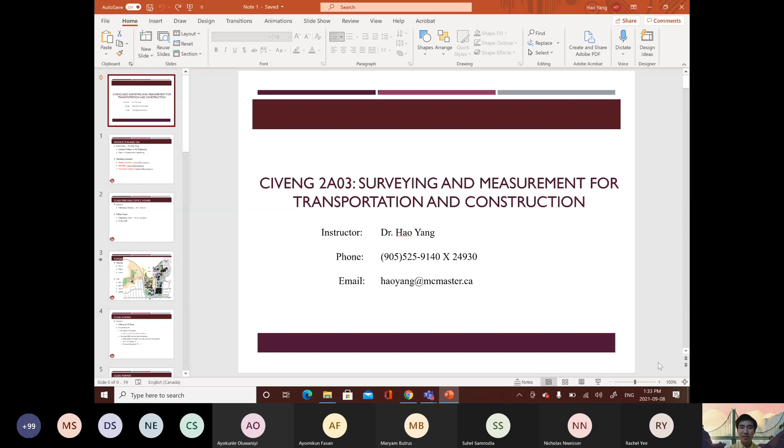First of all, my name is Hao Yang. I'm now a faculty in the Department of Civil Engineering. You can find my office phone number and email address. This year it might not be easy to find me through the phone, but I will always reply through email. Also, as we are using MS Teams, if you have any questions about the class, homework assignment, or exams, you can always send me a message through Teams.

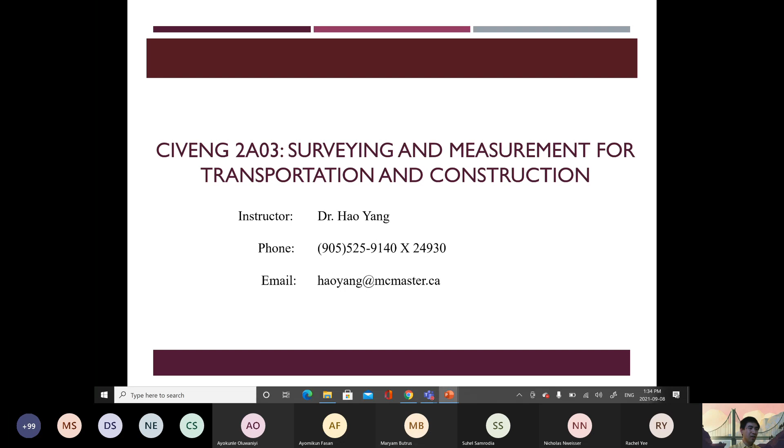For the instructors and TAs of this class, I'm Hao Yang, and my major is transport engineering, which is also the reason we have some slight modifications to the previous surveying class. In the updated course contents, we will focus more on surveying in the areas of transportation, like how to conduct surveying about curves, and how to conduct route surveying to design highways and local roads. Those contents will be included in almost the second half of this class.

So those are the persons that are going to support this class.

Regarding the class time and office hour, you may already know the class will be offered twice every week, on Wednesday and Thursday at 1:30 to 2:20 p.m. So we have 2 one-hour sessions every week. For the office hour, I designed a 1-hour office hour just before the lecture on Wednesday, and it will also be offered through MS Teams.

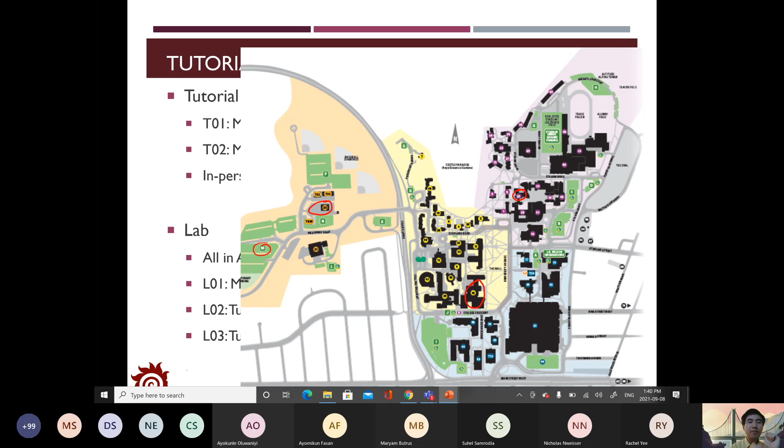We will have 3 lab sessions every week: Monday morning, Tuesday morning, and Tuesday afternoon. I know each of you have already selected one session, and some of you will attend the in-person lab experiment. This means we need to know the details about how many students will be in each session. With that, we can assign the teams for this class. Usually each team will have 5 students, so you 5 can work together to complete all the lab experiments. So that's all the schedules for the sessions in this class.

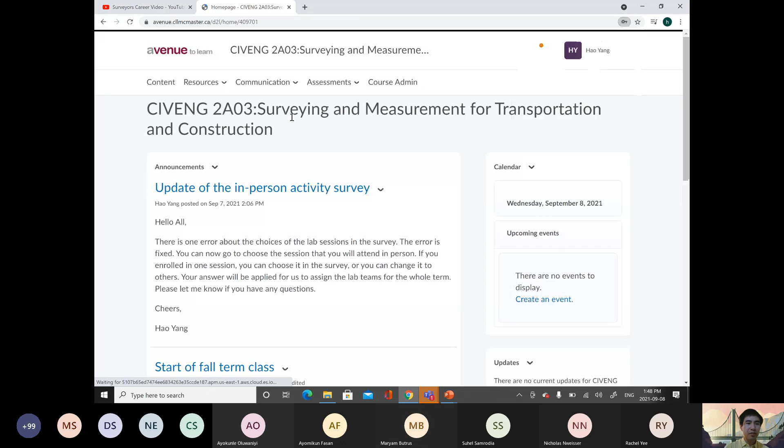So you need to go to the class and enter the survey, enter the resource. You can find it if you scroll down to the end, and there is a survey.

You can choose the first one, the in-person activity survey. There will be 3 questions you need to answer. The platform on your side will be different from mine. I'm the owner, so I'm not allowed to make any selections, but on your side you can directly see all 3 questions and make your selection about whether you're going to take the in-person activity or which lab sessions you're going to join.

The next question is whether labs and tutorials alternate each week, or there's both each week. That depends. I will show you more details about the schedule of the tutorial session and the lab session, so you will know what you need to do for each week, whether there's any tutorial or lab session. But the schedule for the lab session is not finalized yet because we don't know how many students will attend the in-person activity.

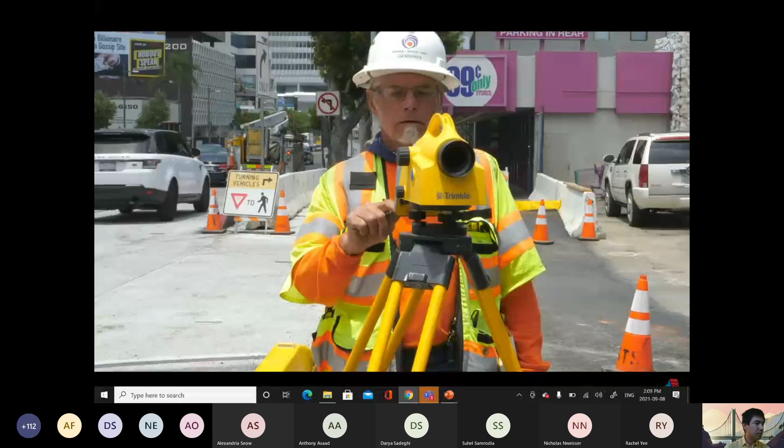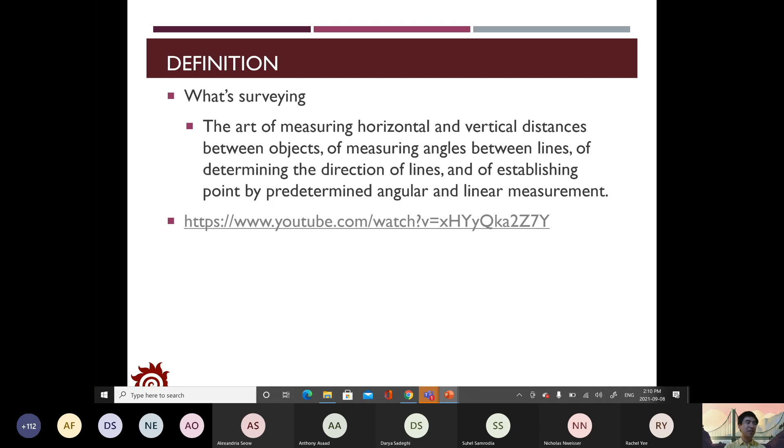Okay, I found that we cannot hear the voice. It doesn't matter, you can actually watch the video later after class. It's a very brief introduction about what kind of tasks the surveyor will need to do. After class, you can just click the video in these notes, which are uploaded to Avenue to Learn, and you can watch them to get more details.

So that's the very brief introduction about surveying. The next thing I'll show you is another definition of surveying. Surveying is also an art - we can only rely on surveyors who possess thorough understanding of surveying techniques, and we'll be able to use these techniques to determine the most efficient methods to obtain optimal results over a wide variety of surveying problems.

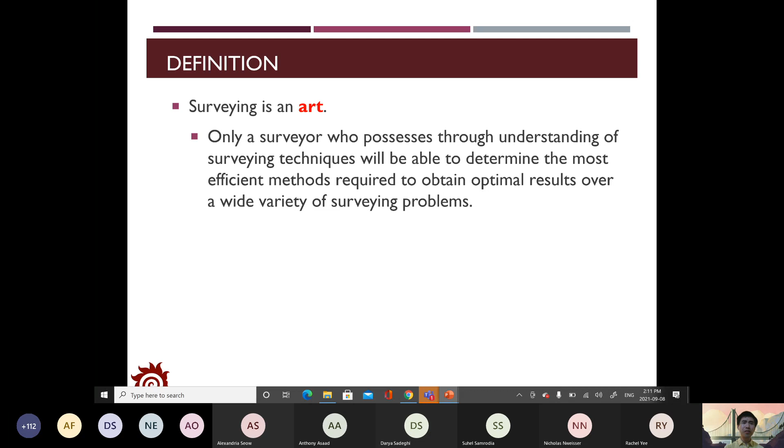For example, if we want to design a highway, we must use surveying to find a way to smooth those corners, and also try to minimize the usage of materials to construct the highway. So all these things require us to do a survey before we start a project.

On the other side, survey is also a science, and we use a lot of mathematical technologies to analyze the data we collect from the field. We also need to do some analysis about the accuracy and reliability of those measurements, and we have to understand the properties of the tools we apply to conduct the surveying.

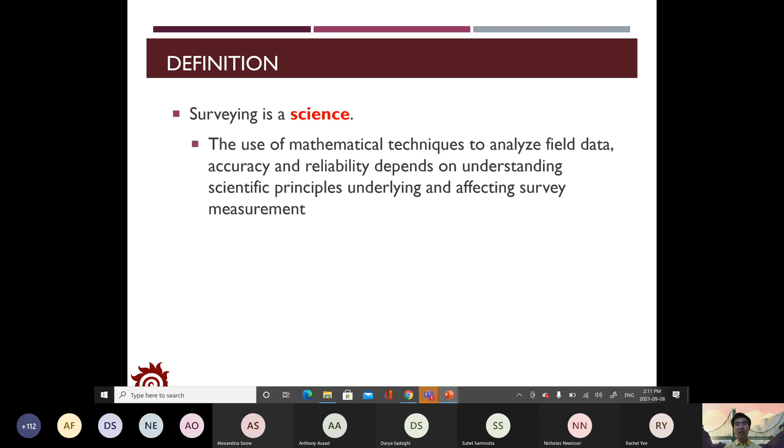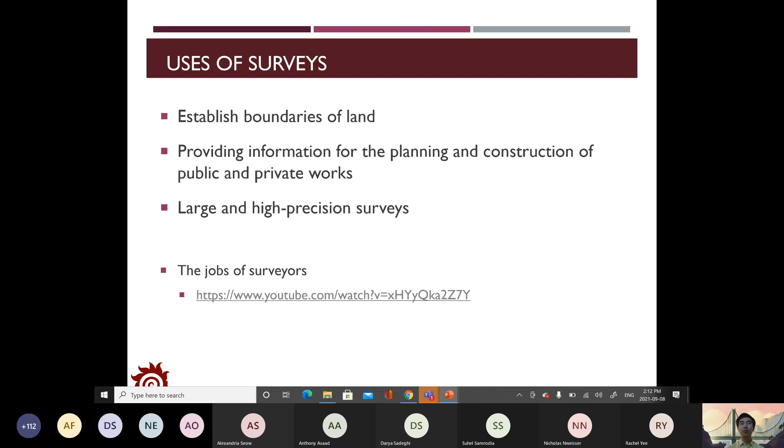So in general, surveying is an art, it's also a science. We can use surveying to do a lot of things, like measure the boundaries of land, provide information for planning and construction of public and private works, and also use advanced modern surveying tools to do large scale, very high precision surveying.

And this would be the applications of surveying. In this class, we will cover 6 major topics, including basic concepts and basic measurements, and also we will move to traverse. For the rest, we will have route surveying, which is one of the major topics we will cover in this class, and also we will introduce GPS surveying, which will be related to modern surveying tools.

And of course, we will have the introduction about AutoCAD. This will be the detailed schedule about each topic covered each week. So from week 1 to week 13, we will have introductions about surveying, measurements and errors, and the fundamental surveying technologies.

The horizontal and vertical distance measurement, the angle measurement, and also we will have the midterm provided in the 5th week. So the 5th week is 1, 2, 3, 4, 5. The 5th week will be October 6th. So in October 6th, we will have the first midterm, and after that...

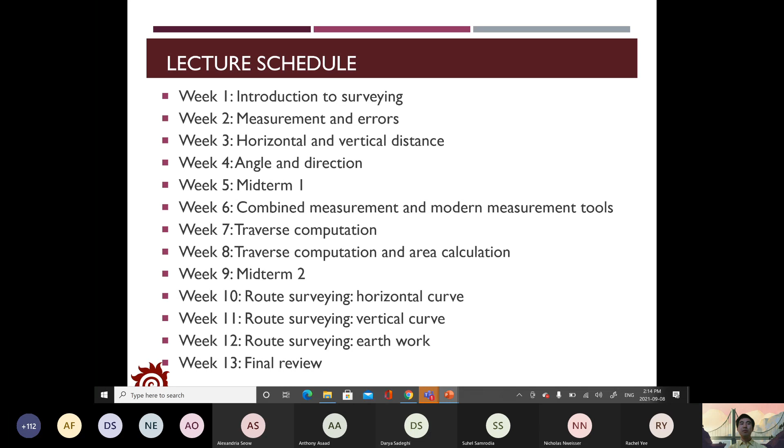We will also have the combined measurement, traverse surveying, and midterm after that, and route surveying. So this is the schedule about the lectures, and here we have the detailed schedule about the tutorial sessions.

We will have for the first week no schedule for the tutorial session, and starting from the second week we have tutorial introduction about AutoCAD, and week 3 will be the second session for AutoCAD, and week 4 will be the homework review, and week 5 will be the AutoCAD sessions.

It's a little bit different. And week 6 will be midterm 1. So this will be a little bit different from what I just explained. Actually, in the lecture tutorial there will be some review about the midterm. Here is the review, not the...

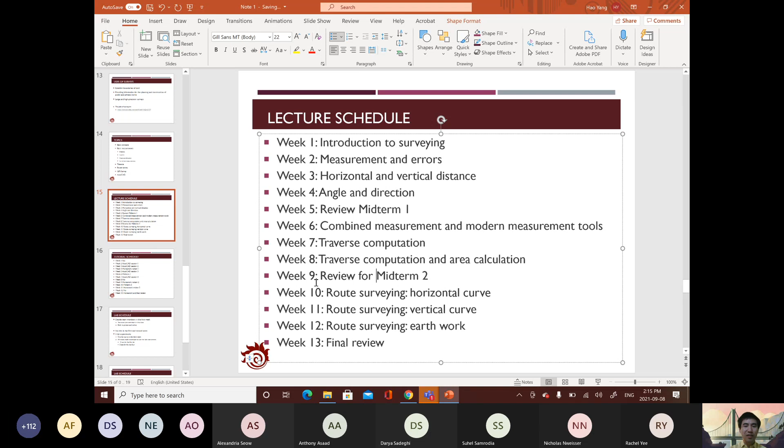With that, I think the exact date for midterm 1 would be October 18th, so after the 4th session. And for midterm 2, that will be week 10.

I just need to double check the date. 6, 7, 8, 9, 10. That will be November 15th.

Correct me if I make anything wrong about finding the date, but the weeks should be right. I'm just not quite sure that I have the correct date for that exam. Actually, we will have the homework review sessions and also the exam review sessions.

And for the lab schedule, we just have some discussion about it. It's very important for you to conduct the survey that I designed in Avenue to Learn. You need to complete the survey even if we are taking the online lectures and the lab sessions.

As I said, there are no labs in the first and second week, and we have 5 lab experiments. The first one starts in the 3rd week, and there will be some limitations about the lab instruments. We only have 10 sets of the instruments for the first lab experiment and 5 sets for the rest of the 4 experiments, which means that for every lab session, the maximum number of teams will be 5 for the same experiment.